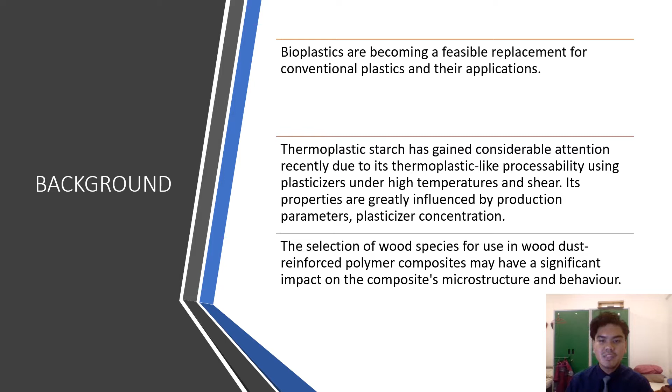microstructure and behavior. For the problem statement, it is because of environmental issues from plastic pollution. We all know that plastic takes hundreds of years to decompose. And next, a limitation of thermoplastic starch, and waste of wood dust, since we don't do anything about wood dust.

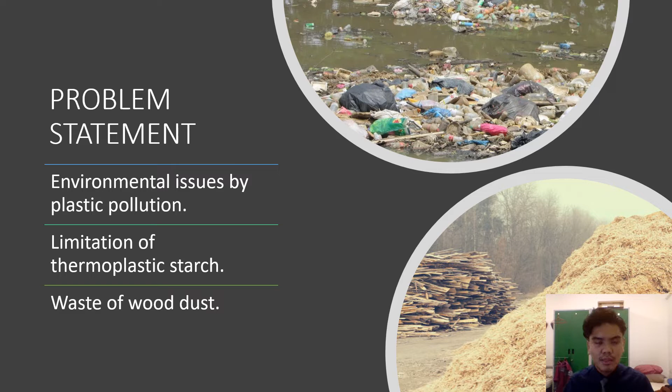So for the objective, to prepare a biodegradable thermoplastic cassava starch reinforced with wood dust fiber composite, then to evaluate the environmental properties of biodegradable thermoplastic cassava starch reinforced with wood dust fiber composite, and lastly, to fabricate the biodegradable packaging derived from wood dust fiber and cassava starch.

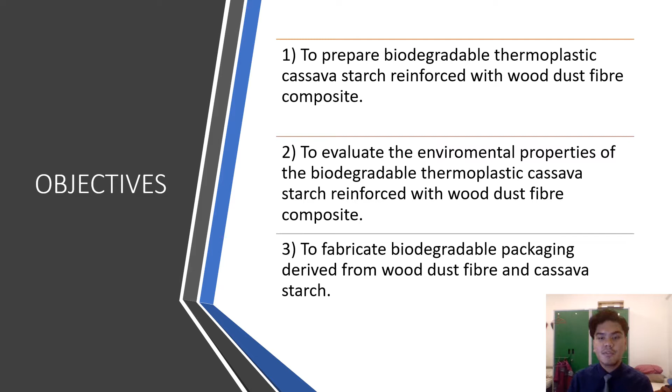The scope of study and limitation. The outcome of the recent study might deliver new information regarding the biodegradable thermoplastic cassava starch reinforced with wood dust fiber composite. The problem related to environmental pollution might be reduced by applying the fully biocomposite material started with wood dust fiber and thermoplastic cassava starch.

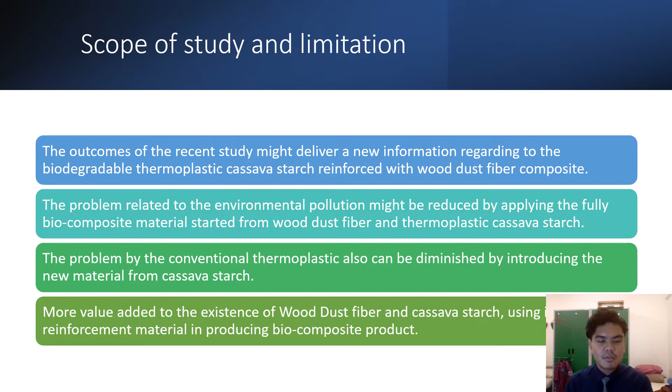The problem of conventional thermoplastic also can be diminished by introducing the new material from cassava starch. More value added to the existence of wood dust fiber and cassava starch, using it as a new reinforcement material by producing a biocomposite product. Okay. So we go to the literature review.

As for the starch, starch consists of amylose and amylopectin, and starch is utilized extensively in non-food industries for a variety of uses. Starch is not only used in the food industry but also in the non-food industry. Then starch is insoluble in cold water, alcohol, and other solvents.

Next is thermoplastic starch, or TPS. The polymer sources employed in manufacturing biodegradable plastic are amylose and amylopectin. TPS, or thermoplastic starch, is made by applying mechanical and thermal energy onto the starch granule by adding plasticizer.

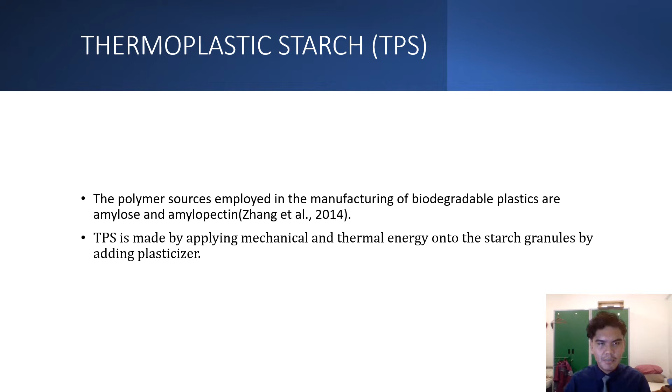Okay, so this is the application of starch. As you can see, there are types of starch: cassava, corn, and sugar palm. So the potential application for cassava, it can be a biodegradable polymer, biodegradable material, food packaging plastic.

As for the corn, we can use it as a green material for packaging, hybrid biocomposite, and bio-based composite. For the sugar palm, it can be a bio-based polymer, bio-nanocomposite material, food packaging, and hybrid biocomposite.

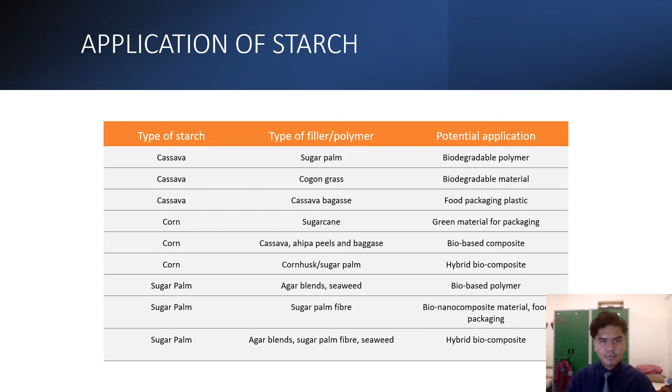So for the wood dust, it is a biodegradable and recyclable material that is used in production of polymer-based composites. It produces a pulp with short fiber that is excellent for tissue and writing paper as part of the furnish. Wood dust is mostly constituted of cellulose, 40 to 50%, polyoses, lignin, and a vast and variable number of smaller relative molecular mass compounds.

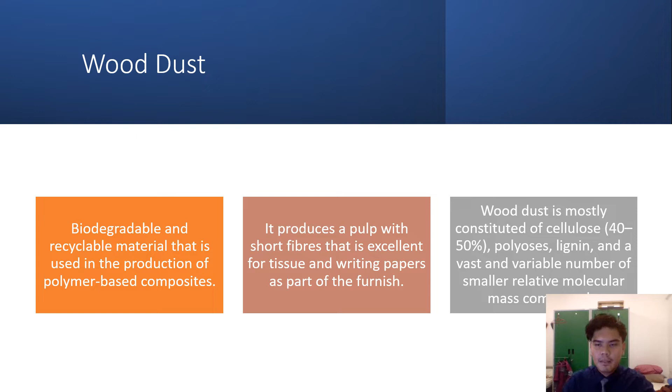So glycerol is a solvent used in production of food flavor and color. It is a colorless, sweet tasting, odorless, and viscous liquid with low toxicity that is widely used in pharmaceutical formulation. Glycerol contains 3 hydrophilic alcoholic hydroxyl groups which contribute to its water-soluble and hygroscopic properties.

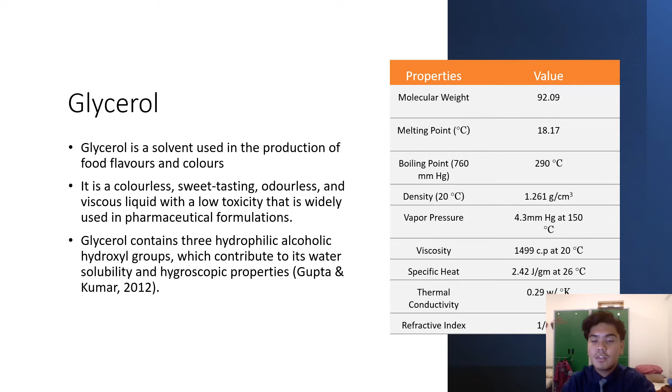So next, I will tell you about the methodology for my project. So this is the research methodology in a flowchart diagram. As you can see, we start with raw material selection, then we divide it into the wood dust fiber, which has a percentage of 10 to 50%.

Then another one is we make a mixture of cassava starch, glycerol, and palm wax to make TPCS, thermoplastic cassava starch, and then either we make a 0% fiber sample to put in the hot press, or make it with a mixture of wood dust, then we hot press it. Then after the sample has been made, I divided the analysis into 3 analyses, which are water affinity analysis, physical analysis, and environmental analysis.

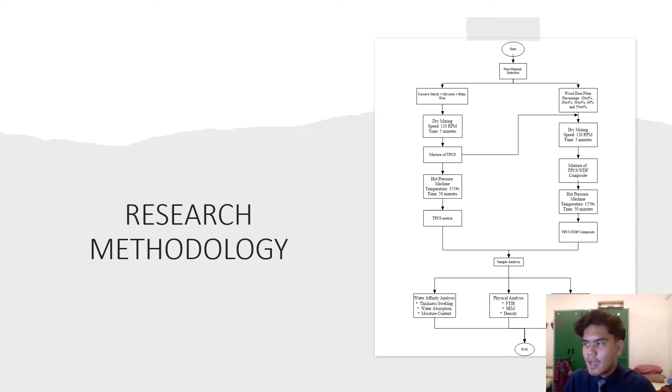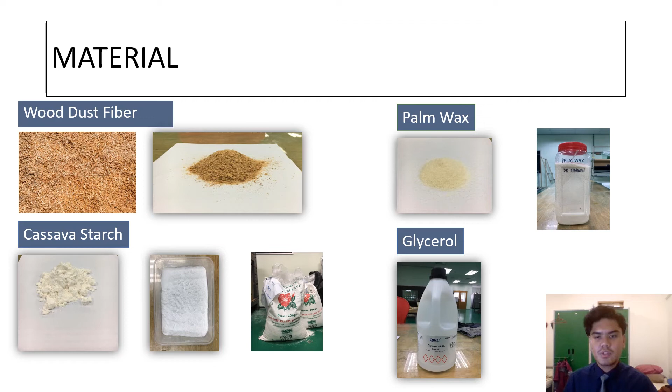These are the materials that I've used to create the thermoplastic cassava starch with wood dust fiber. First we have the wood dust fiber, then we have cassava starch, palm wax, and also glycerol. So this is the preparation of thermoplastic cassava starch reinforced with wood dust.

So first we have to weigh the cassava starch, then weigh the glycerol, weigh the palm wax, weigh the wood dust with a specific weight, then we weigh the mixture and then blend. After we blend, we compact the mixture into the mold that has been made. Later, we place it in the hot press machine for 50 minutes. After 50 minutes, we remove the mold to take the sample out.

So I will explain about the water affinity testing. The test that I will make is moisture content. We only use an electronic weight scale as the apparatus. Then for the calculation, I only take the percentage of moisture content: weight after minus weight before, then divided by the weight before, then we multiply it by 100% to get the percentage. Then the next test will be water absorption.

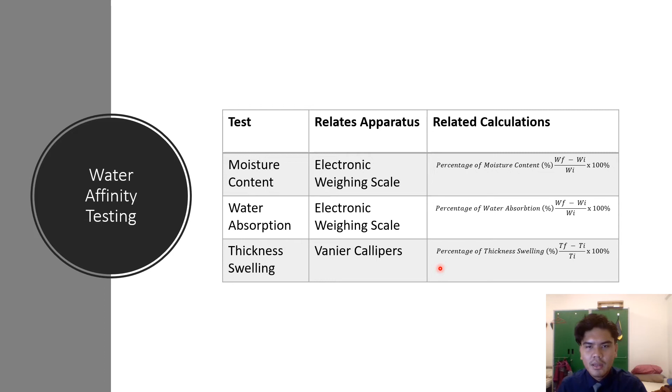It also uses the electronic weighing scale, and the calculation is also the same, where I only take the percentage with the same calculation. Then I will take thickness swelling, but in practice I will only use the vernier caliper. Also for the calculation I will use the same calculation to take the percentage.

As for the environmental analysis, there are two tests that I will make: water solubility and soil burial. For water solubility, I will use the electronic weighing scale as the apparatus, and the calculation is also the same, where I will take the percentage of weight reduction. And for the soil burial, I will use the electronic weighing scale, and I will also take the percentage of weight reduction.

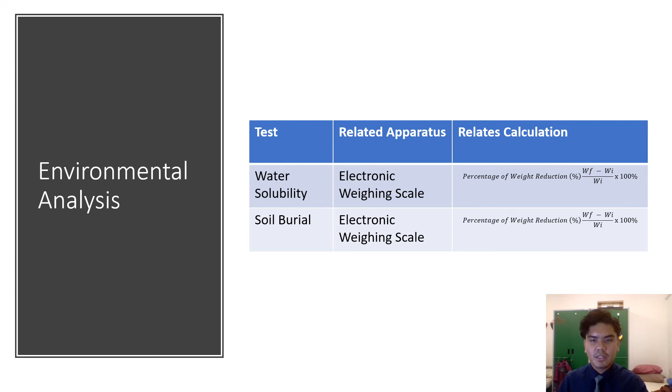So next is the physical analysis. For the physical analysis, I will also make two tests, which are FTIR, Fourier transform infrared spectroscopy, and SEM, scanning electron microscopy. For the FTIR, I will use the JASCO FT/IR spectrometer, and for the SEM, this is the EVO 18 scanning electron microscope.